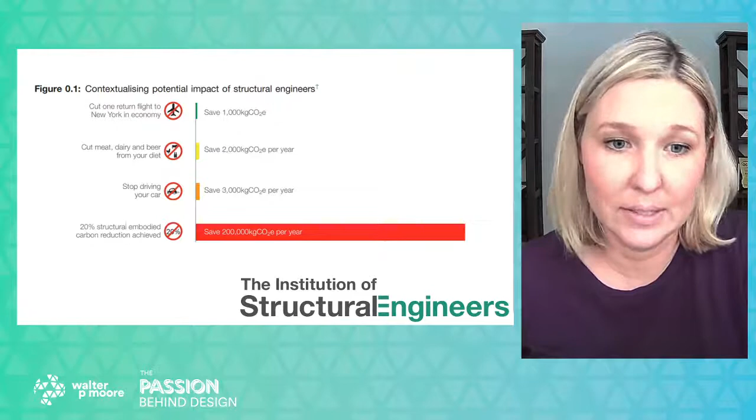So we'll dive in here about what are carbon footprints. Carbon footprints are the total amount of greenhouse gases, including carbon dioxide and methane, generated by our actions. For a building, the carbon footprint is all of the carbon generated by three buckets: embodied, operational, and transportation carbon. Transportation impacts are all the impacts related to transportation to and from the building.

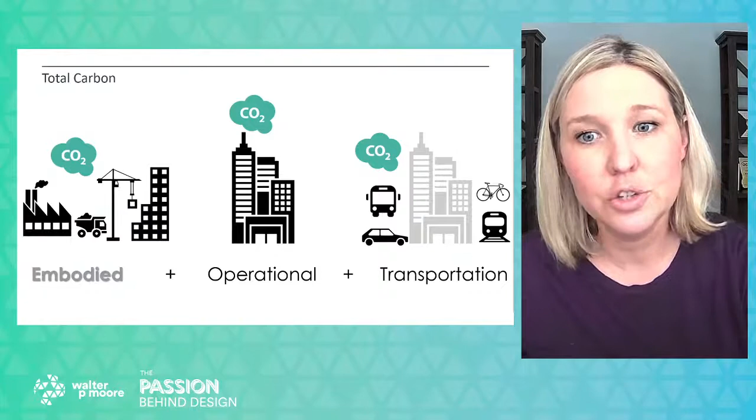Operational is all the energy or carbon it takes to run the building. But today I'm going to be mostly speaking about embodied carbon, because this is the piece that is largely within my control as a structural engineer. Embodied carbon has to do with all the materials and products used to construct the building. It's all of the carbon dioxide emitted by extracting, manufacturing, transporting, and installing materials.

And it's not a small amount of carbon. Every year, 66 billion square feet of buildings are constructed, and the embodied carbon emissions of that construction is approximately 3.8 billion metric tons of CO2 per year. That's a lot of carbon. In fact, we're building so much that we're actually building a new New York City every month for the next 30 years. And between now and 2050, we're going to add 2 billion people to the planet and close to double the square footage of the built environment.

So next, I'm going to play a little video, hopefully it works, from Bill Gates, and he's going to talk about basically the basics of embodied carbon. So let's watch.

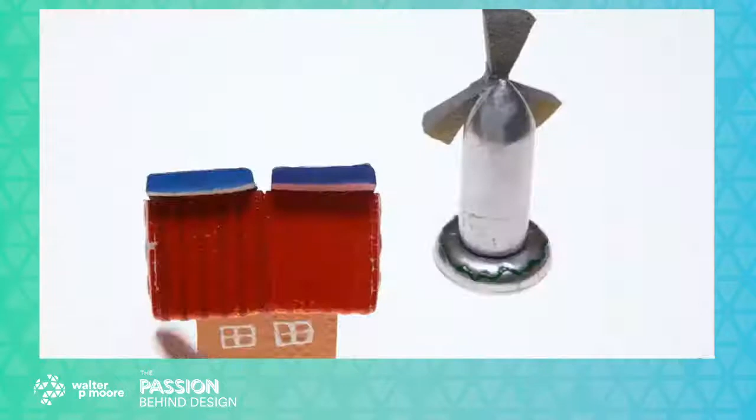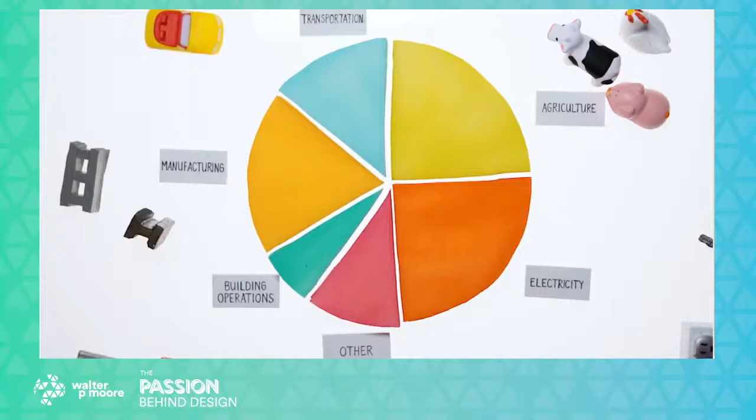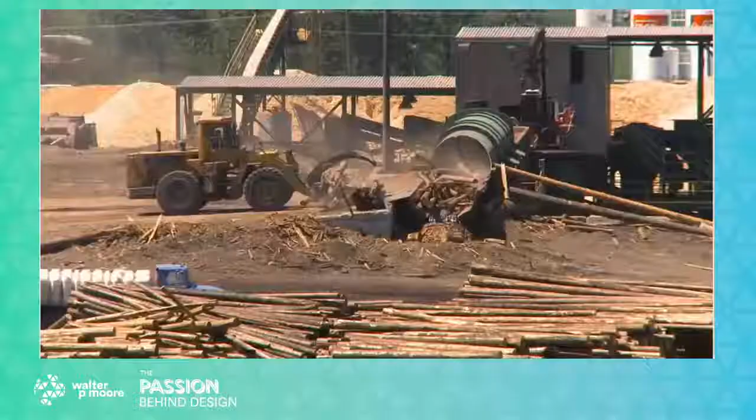Well, let's talk about climate change. Now, people think, hey, aren't we getting solar panels and windmills to be a lot less expensive? And isn't that helping reduce greenhouse gases? And the answer is absolutely. But there's a lot more to do than just taking electricity to zero emissions. There's a variety of things that generate greenhouse gases. We have a lot of sectors of the economy, like manufacturing, that are emitting greenhouse gases that aren't talked about as much. Manufacturing, everything we make, even a cute little squishy like this, that's emitting 31% of the greenhouse gases. The number of buildings in the world is going to double by 2060. It's like we're going to build a new New York City every month for the next 40 years. It's a gigantic amount of materials. Steel, cement, wood, all emitting greenhouse gases. We're going to have to figure out how to make all these things in a different way. And so we're going to need a lot of change, a lot of innovation to bring the emissions from all those areas down to zero.

So I think that's a great video that kind of sums up what we're dealing with. All the little squishies and all the things we're making, they all have embodied carbon. And for us in the building industry, there's a lot of embodied carbon because we're dealing with really highly impactful materials like concrete and steel. And so we need to figure out how to reduce our impact.

And we know that if we carry on with business as usual, the Intergovernmental Panel on Climate Change shows that we will well overshoot the goal of staying below 2 degrees Celsius. That's the goal. We don't want to increase global warming. We want to stay below that 2 degrees Celsius threshold. And in order to do that, we need to change the way that we're doing things.

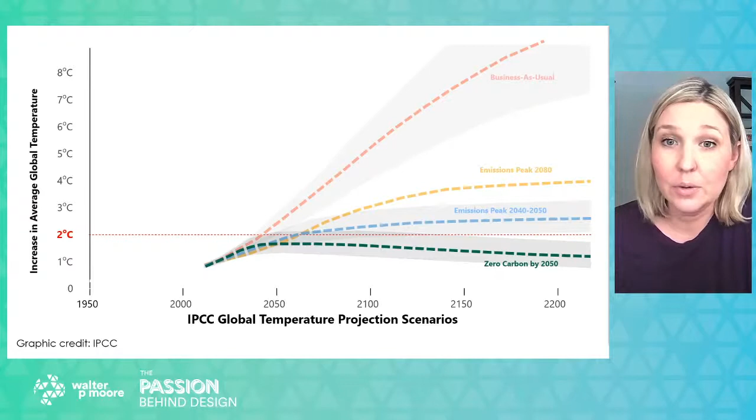So looking at this a different way, these graphs are from Architecture 2030. It's a group that focuses on sustainability in the built environment, a group of architects that are really focused on this. We know that buildings alone account for 40% of global greenhouse gas emissions. And 28% of that is from operational, which is largely where the focus has been, and rightly so, because it was a bigger piece of the pie.

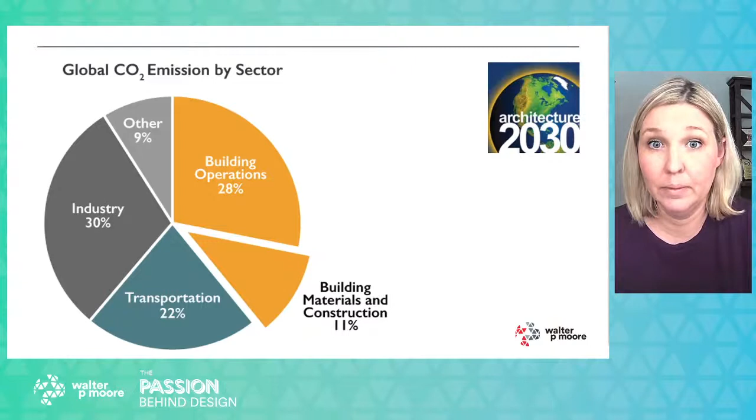But the thing is that as we've driven down operational emissions by putting PV panels on the roof and focusing on reducing the operational impact of the building, we've needed to make a shift to focus on the 11% that's due to embodied carbon. And the critical thing about embodied carbon is that it happens day one when the building opens, and it never gets reduced. There's no future efficiency that'll drive it down. You can't decide, okay, let's put PV panels on the roof and in any way affect the embodied carbon that's already there. It's there when you build the building. It's there when you construct the steel frame. It's there when you pour the concrete, and there's nothing you can do about it later on.

In the next 30 years, the critical time period according to the Intergovernmental Panel on Climate Change, embodied carbon will account for half of new construction carbon. So as we approach 2050 and try to decarbonize the building industry, we can't get there without focusing on this piece of the pie.

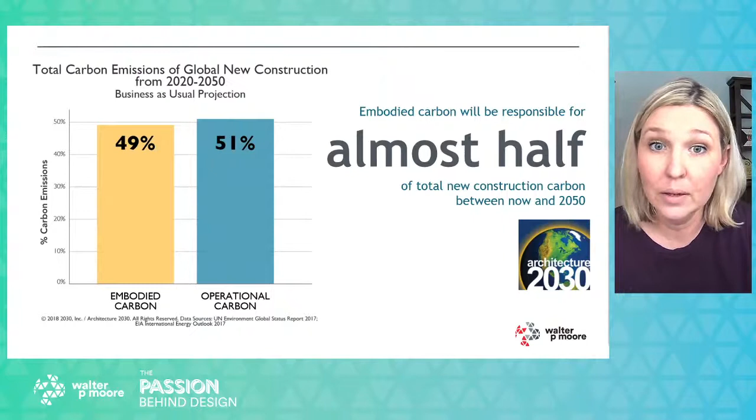The breakdown of embodied carbon can vary wildly from project to project based on size and materials. All buildings are really very different. But we know a couple things: most of the emissions are from structure, mostly steel and concrete, and most of the impact from concrete is from the cement.

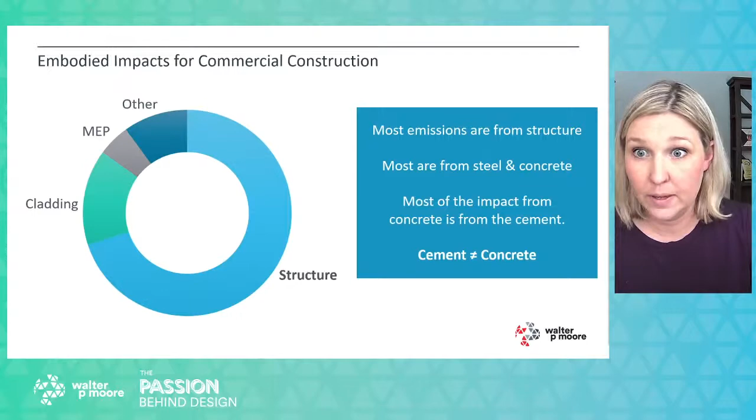Cement is not the same thing as concrete. Cement is a part of concrete. Cement is to concrete what flour is to a cake - it's just one of the components. It's the binder. Concrete also includes aggregates, rocks and sand, water, air, and admixture.

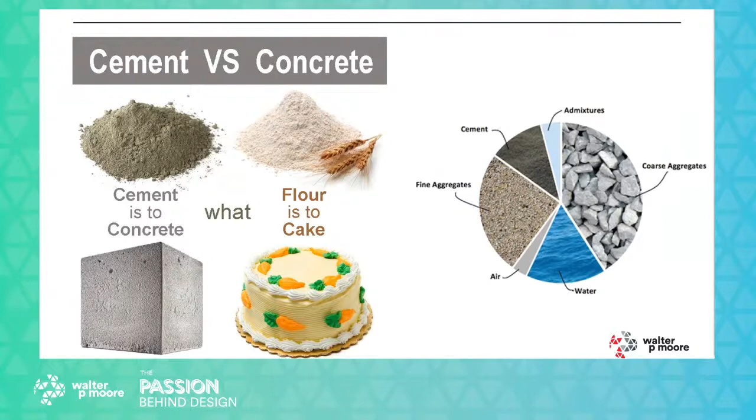Cement actually makes up only 12% of the weight of concrete, but it's responsible for 95% of the carbon emissions. It's the second most consumed resource in the world after water, with more than 4 billion tons produced globally every year, and it accounts for 5 to 8% of global carbon emissions.

The reason this material is so carbon intensive is because it takes a lot of energy to produce, and it produces CO2 as part of the reaction. So it's a double whammy.

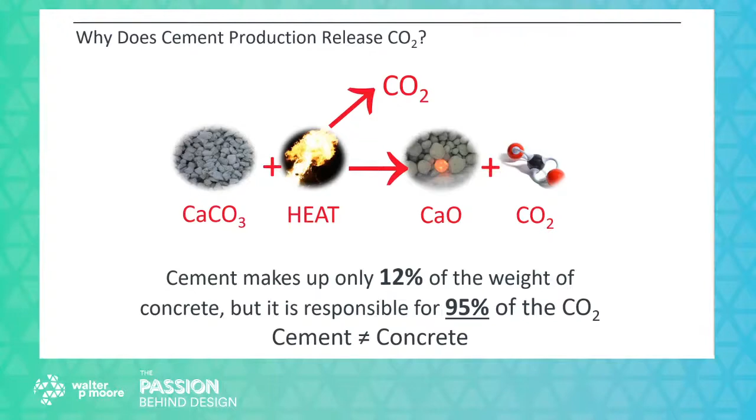But in many cases, we can actually use less cement, and we really should try. I'll talk more later about how we try to use less cement in our designs. If you're looking for more information on concrete and embodied carbon, search YouTube for these Girl Scouts. This topic has gotten so mainstream that even the Girl Scouts are talking about it and concerned about how we're going to reduce the embodied carbon in building materials.

So let's pause here for some questions and discussions, and we'll get into what the building industry has been doing about embodied carbon and what you can do.

So Kelly, what is the biggest hurdle in the building industry when it comes to sustainability? I think it's just thinking that we should always do things the same way. A lot of the building industry just wants to do what they did yesterday because they know it works, they know it's safe, they know they can get those materials. So trying to think outside the box, trying new things, is one of the biggest hurdles in sustainability.

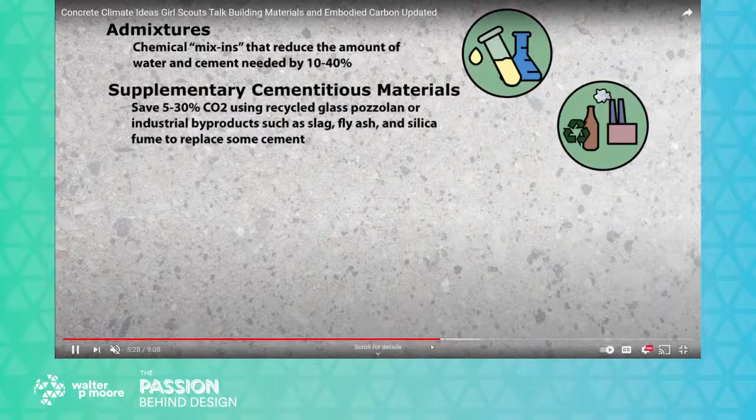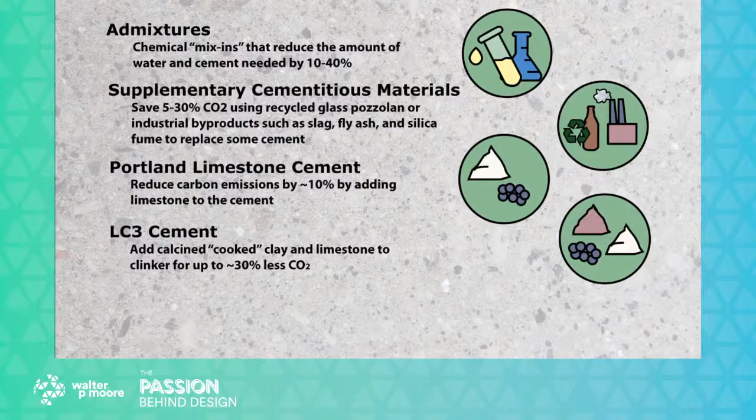So how often do you speak to clients or architects or people deciding whether a building is more sustainable or not? How many times a week do you make this pitch as to why we should be more sustainable in our approach to building? Yeah, I talk about this almost every day because that's part of what I do - lead these conversations. So I'm having sustainability conversations every day, and there's a lot of people discussing this all the time.

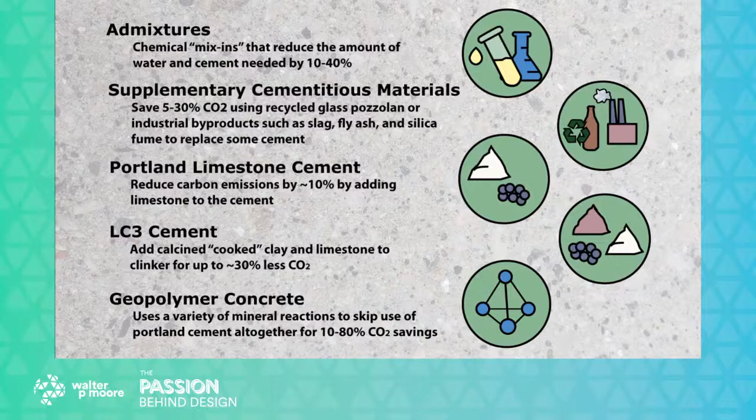Since I know we're speaking to a student crowd, I want to assure you that the industry is focused on this. We are having these discussions on our projects. We are trying to figure out how to make things better, how to make our buildings better, and how to come up with new ways to address these problems.

Great, so let's continue, and I'm sure you're going to share more about different organizations you're a part of and other things you're doing to progress the industry to a more sustainable future. Yeah, so let's see what the industry's been doing about embodied carbon.

There's been a groundswell of discussion and advocacy around embodied carbon in the last couple of years. In 2019, the World Green Building Council released the Embodied Carbon Call to Action report. This is the first call to action that really started to name all the stakeholders involved in embodied carbon and task them with what they can and should do about it, with deadlines.

Architecture 2030, a group I mentioned earlier, is a leader in this space. They first issued the 2030 challenge for all new buildings, developments, and major renovations to be carbon neutral by 2030. But this only dealt with operational energy. So they issued a 2030 challenge for embodied carbon to be carbon neutral by 2050 - this was an add-on that they provided.

Then also the American Institute of Architects, or AIA, has AIA 2030, which is a commitment to the 2030 challenge issued by Architecture 2030. They've also made a commitment to materials as well and increased their attention to embodied carbon. Another organization that's a true leader in this space is Carbon Leadership Forum.

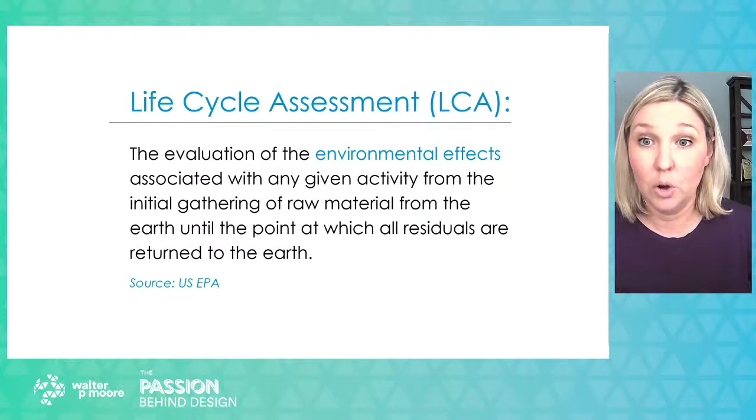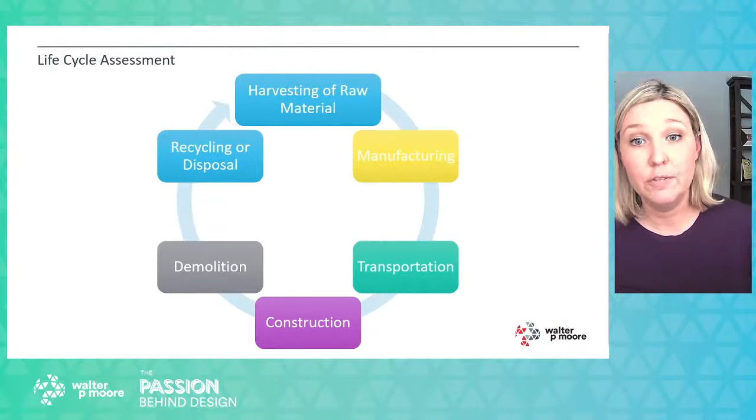It's an evaluation of all the environmental effects of a material or process, from the initial gathering of the material from the earth until the point at which all residuals are returned to the earth. It's an ISO-governed process, meaning governmental agencies govern what this process looks like. We look at all phases in the life cycle of the material, from harvesting through manufacturing and construction to demolition and disposal.

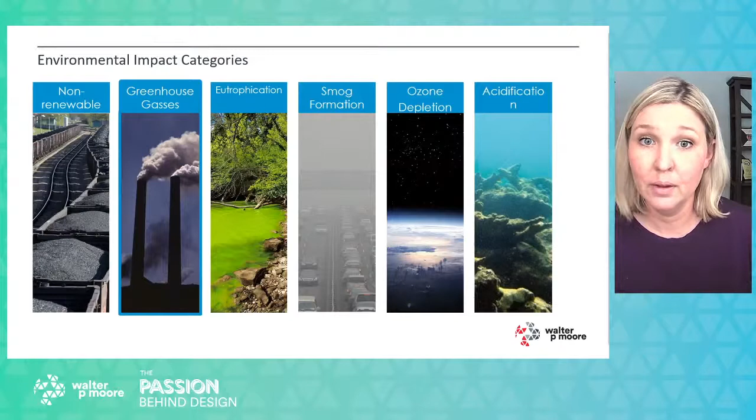Then we look at multiple environmental impact categories, including greenhouse gases or global warming potential. So we establish our baseline structure for our whole building LCA. We look at all of the structure and all of the enclosure. From there you can also consider other elements like carpet, floors, or ceilings, but at a minimum we're looking at the structure and the enclosure.

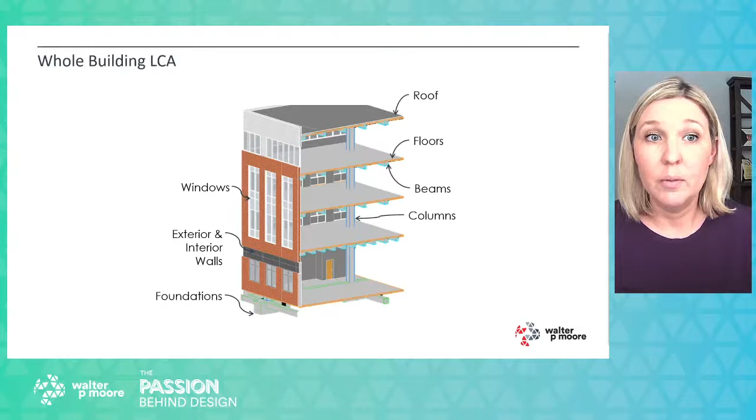And then we put it into a software. In order to actually perform the LCA, or the embodied carbon analysis, you have to start with quantities - how much concrete, how much steel, how much wood is in your building. We can usually get this from our building information model.

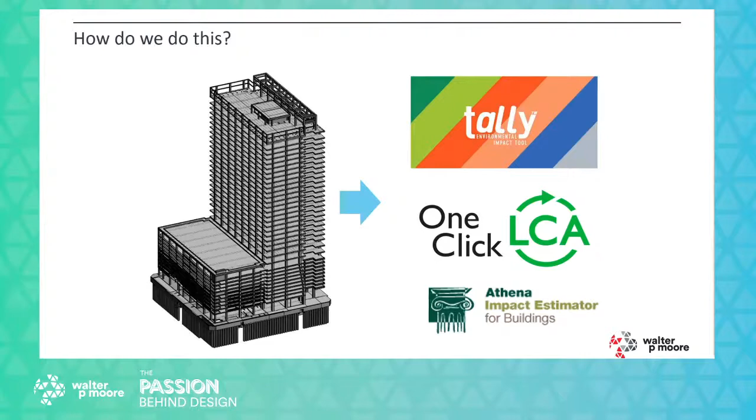We use a program called Revit in order to produce our drawings and build 3D models. Then we can take all the quantities in those models and put them into an LCA software - I've listed several here, such as Tally, One-Click LCA, and Athena - to get the environmental impact of all these materials.

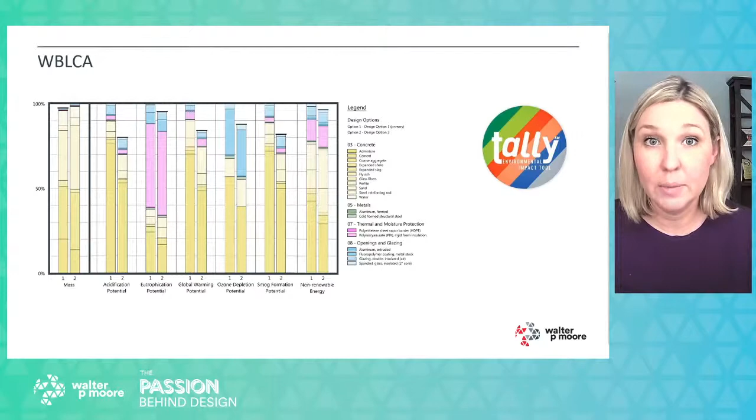And from that you get an output showing, in this example, a 1 and a 2 - your baseline building and an improved building where you've made better decisions. It breaks down the impact by material, and from this you can determine where your greatest impacts or hotspots are, then take steps to reduce your impact.

These are some strategies we use to reduce our impact: things like specifying less cement. We can use supplementary cementitious materials like fly ash, a byproduct of the coal industry, or slag, a byproduct of the steel industry. These are similar to cement but not exactly cement - basically recycled products because they're byproducts from other industries. We can use those materials in lieu of cement, which is really carbon intensive.

We can also specify each mix for its appropriate usage. What that means is sometimes we'll let our columns and foundations cure a little longer - they don't need to get strength so fast - so we can use less cement in those mixes.

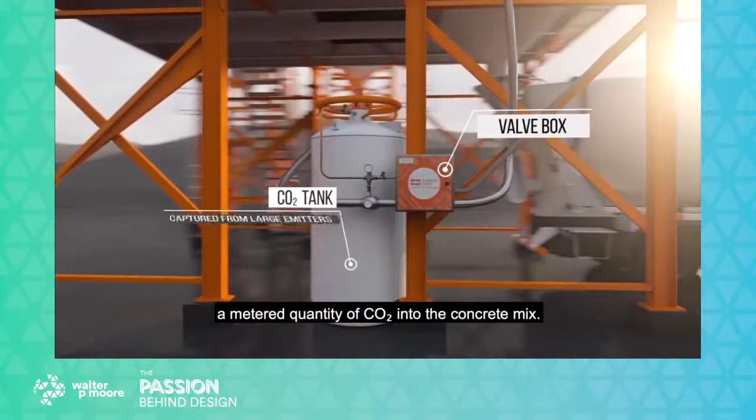We can also use really cool technologies like CarbonCure, where they inject CO2 gathered from industrial sources into a concrete mix. It not only makes the concrete mix stronger, but also reduces the cement content. We inject that CO2 into the mix - it allows more concrete particles to form, reduces the cement content, and actually sequesters carbon. It's a really cool technology, and there's a lot of other neat technologies available on the market.

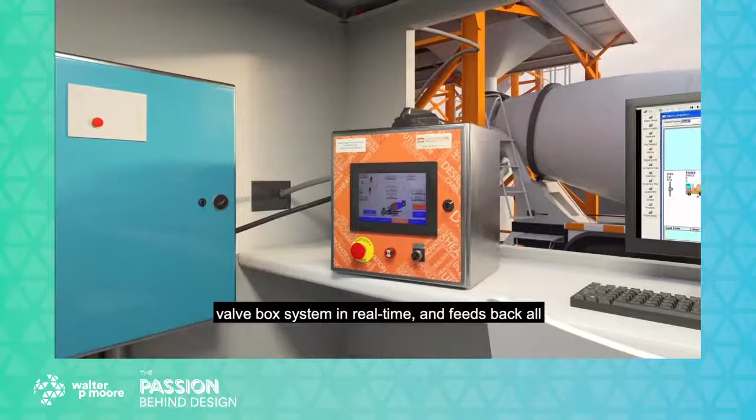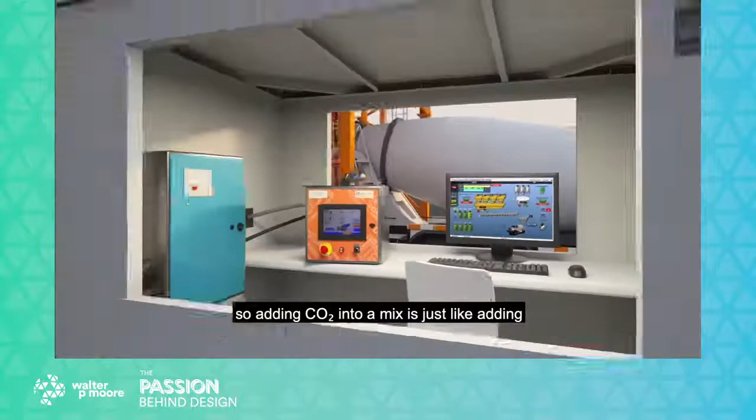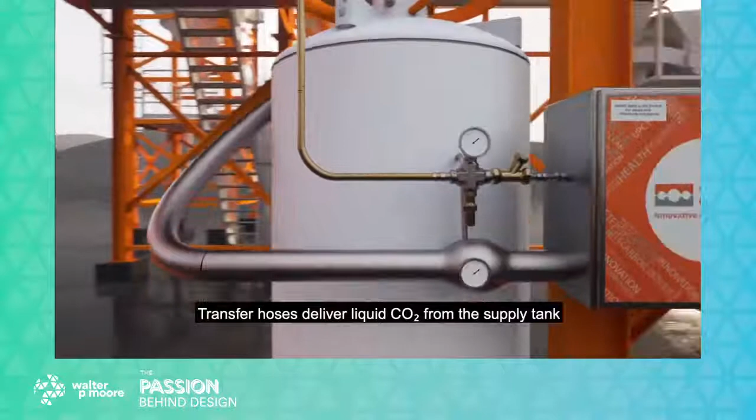We can use salvaged materials - materials that have been used in another application, maybe a steel beam or wood, in different types of applications. We can better understand our supply chain. Sometimes just knowing you're going to get your steel from a plant that runs on a PV grid versus a coal grid can really improve the embodied carbon of your building. So knowing all these things, repurposing existing buildings, being really efficient in our designs - all of those things can help lower the embodied carbon of a structure.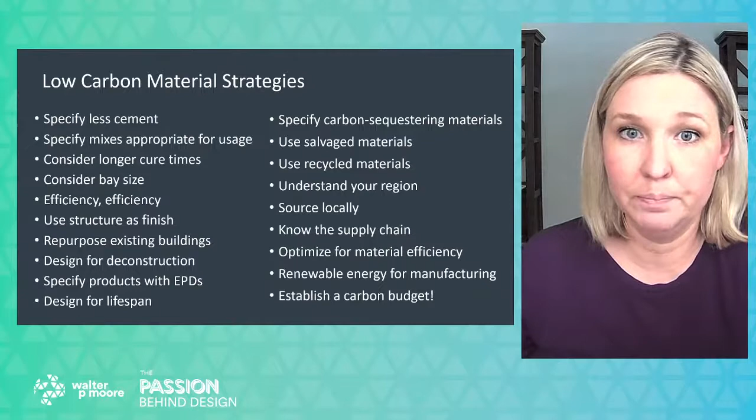We use this LCA thinking when coming up with ideas for the types of buildings we're going to design, and we can use it to decide which structural system to use. In this example, you have cast-in-place concrete and structural steel, and two types of wood structures. We looked at where the impacts are for each of these, and can we make a decision for this building based on the lowest embodied carbon impact?

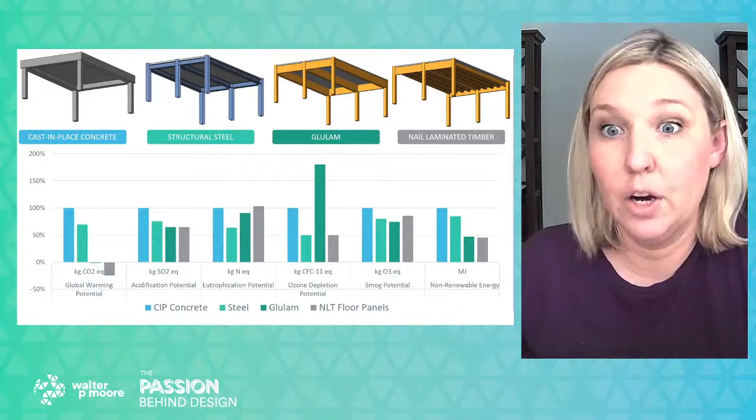So I think let's pause again for some questions, and then we'll wrap this up and talk about some available resources. So Kelly, does the distance by which you source products make an impact on the sustainability metrics for buildings?

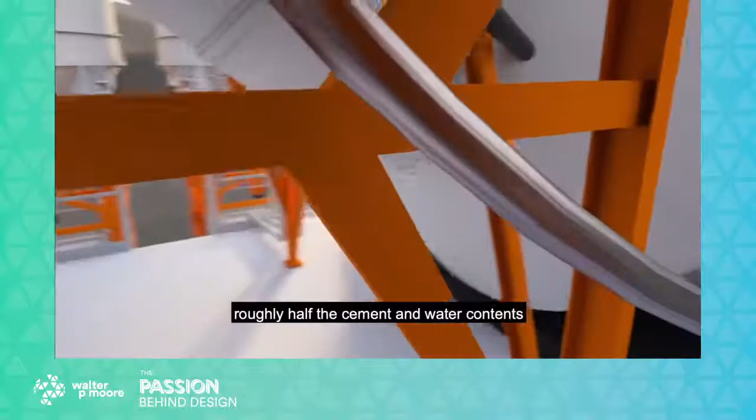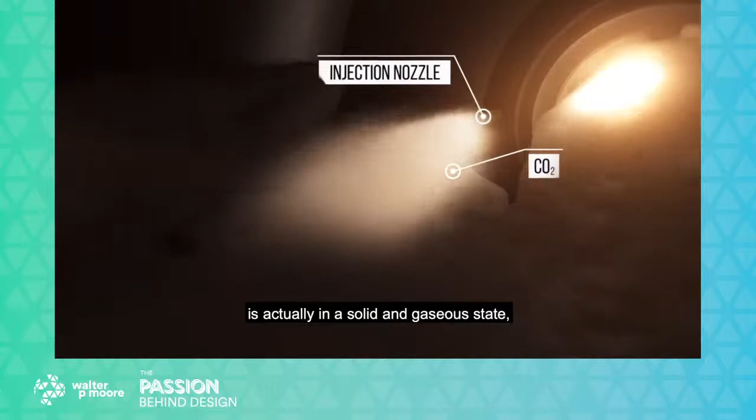So it can, it's something that we consider. We factor in transportation impacts when doing a whole building LCA, but sometimes it's better to use a product from farther away if it's lower carbon than a more local material that's higher carbon. It used to be that we just looked at regional and recycled materials, attribute-based things. But now that we're doing whole building LCAs, we can take all of that into account, comparing lower carbon materials from further away versus higher carbon materials that are local. So the answer is it depends, and we consider that.

Do you participate in any of the organizations that you highlighted in the past section? Yes, I participate in all of the organizations that I highlighted. We are really active at Walter P Moore with all of the industry organizations. We want to make sure we're touching them all and staying in contact with all of those organizations that are having an impact on the way we're looking at sustainability, how we're addressing embodied carbon, and all the decision makers.

All right, let's move on and talk about other resources available. I wanted to point out a couple embodied carbon resources that you might find useful.

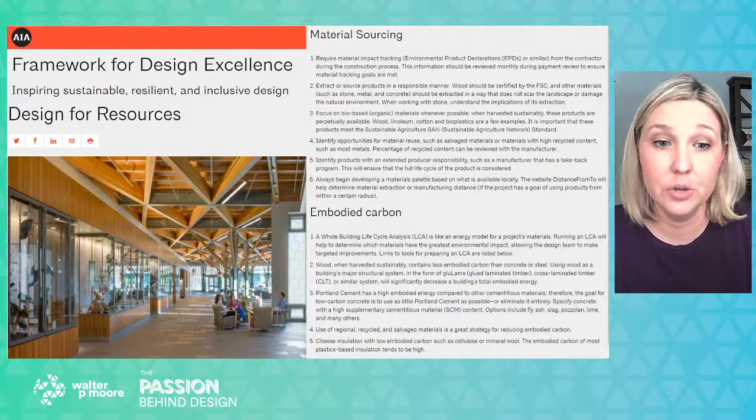The first resource is the AIA Framework for Design Excellence. The framework is made up of 10 measures, and it's intended to be really accessible to every architect for every project. It's a great resource that deals directly with embodied carbon and best practices, and it's really attribute based, giving best practices, best things to do on projects. It's an easy to read resource for anyone interested in learning more about what architects and engineers are doing to address embodied carbon.

The next one is a really interesting resource: the 2030 Palette by Architecture 2030. This goes beyond embodied carbon. The 2030 Palette is a free online platform that curates information and practices and provides guiding principles for creating low carbon buildings. The sustainable design strategies address energy consumption and greenhouse gases at all scales, from regional and city planning to big building details to small building details that can even be applied to residential.

As part of the palette, there's a materials palette that was developed specifically for materials and embodied carbon. It's an attribute-based approach to embodied carbon reductions that identifies key attributes contributing to a material's embodied carbon impact, and it offers guidelines and options for emissions reductions.

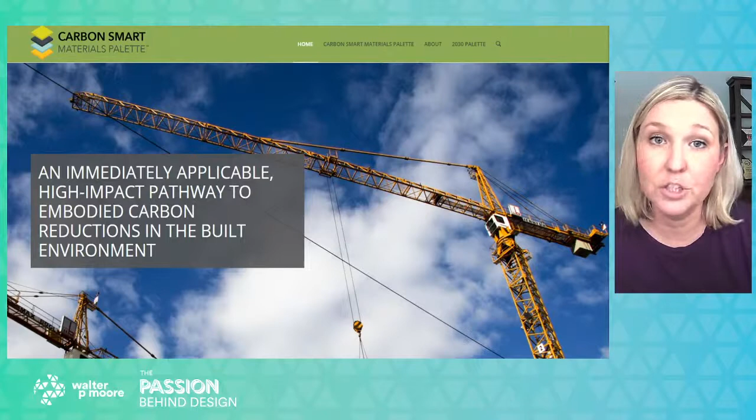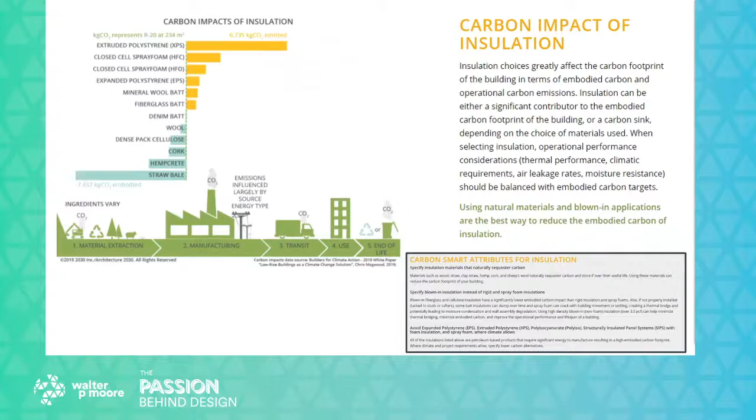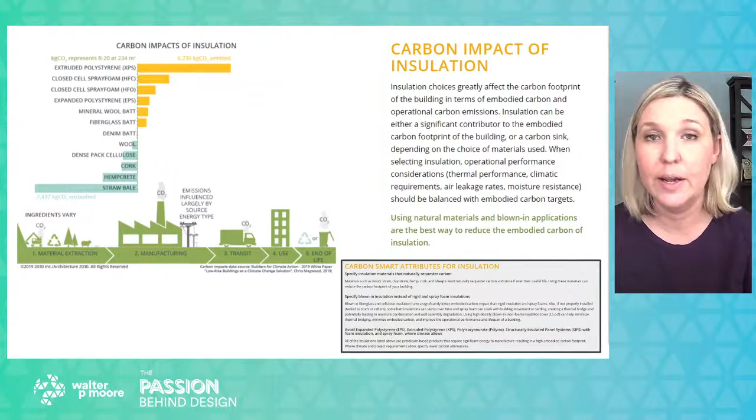The palette offers great information on different materials and how to make better choices. This is the insulation page, for example. Insulation is like a sweater for buildings, the thing that goes on the outside that keeps them insulated. This is basically a guide on the best types of insulation with respect to carbon. It provides a list and says straw bale is the best, and EPS and XPS are the worst. It also tells you about the whole manufacturing process, so it's a really cool resource to find out how materials are made, why they're carbon intensive, and what better choices are available.

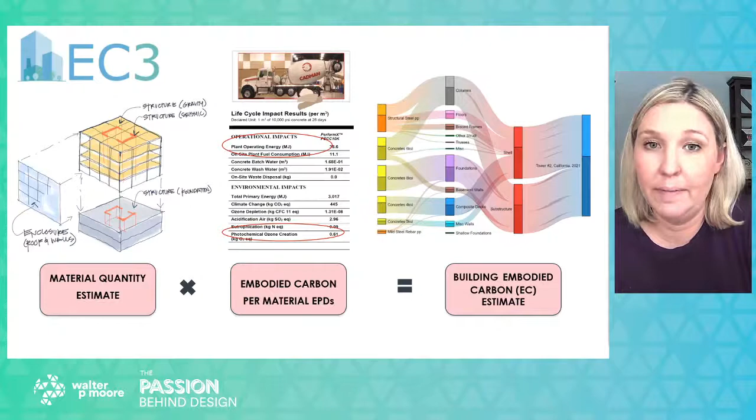This is another free resource, the Embodied Carbon in Construction Calculator, or EC3. You can basically build a whole building in here and see the carbon impact of that building and where you can make reductions, whether in the concrete, steel, carpet, or ceilings. It's a great tool to play around with, creates really cool graphs, and it's free, so I recommend you try it out.

And then this is just a really simple tool to get an understanding of what kinds of numbers we're talking about when we're talking about embodied carbon. This is called Ecom, the Embodied Carbon Order of Magnitude tool, and it was created by SE 2050.

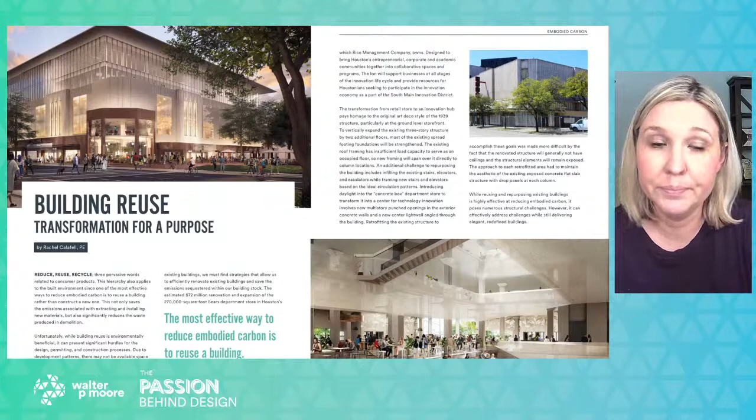At Walter P. Moore, we wanted to contribute to the conversation, so we issued this embodied carbon report. It's a clearer view of carbon emissions, with great articles and resources that dive into embodied carbon and how we're tackling it as a firm. It has a lot of great project stories and best practices of what we're doing on our projects and how we're trying to make our buildings better. That's all I have for today, and I'd love to take any questions. Connect with us afterwards if you're interested in learning more.

Thanks, Kelly. A few questions before we sign off. How can you tell if a building is sustainable and made of whatever type of material? Is it easy to tell? Is it difficult? If you're thinking about just looking at a building?

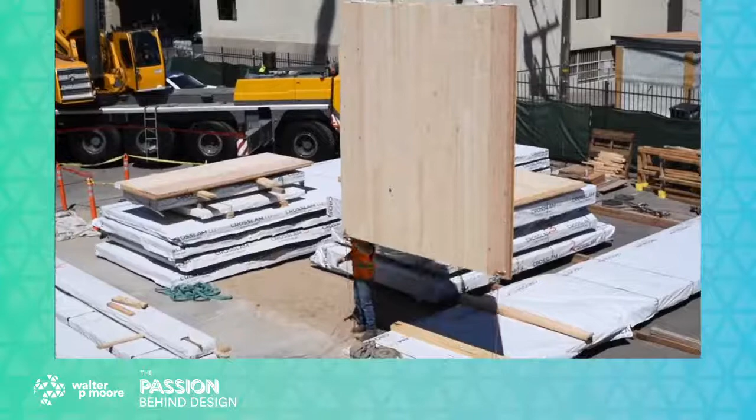It's not really easy to tell if a building is sustainable. For example, you may think a building made out of wood, let's say mass timber, is really sustainable, but it's really important where that wood came from. That's one of the things we look at when doing a whole building life cycle assessment, or just designing our buildings. It's really important where all the materials came from. You want to make sure that wood was harvested sustainably in a forest where they're replanting trees. It's not very helpful if you take wood out of a forest and put it in your building and then don't replant the trees. That stops the cycle right there.

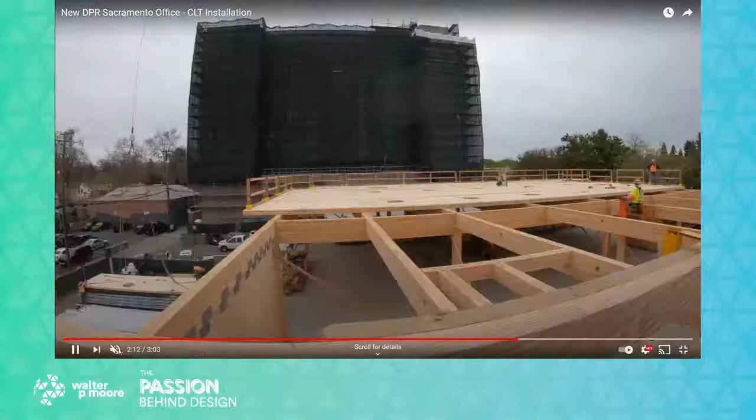So it's really important that you look at all aspects. That's why whole building life cycle assessment is so important, because it looks at the whole building holistically and doesn't just make assumptions about best practices. There are some best practices you can do without a whole building life cycle assessment, of course. Using the 2030 palette is a good way to do some of that, like using mineral wool insulation. There are always better choices you can make, but it's important that within those choices, you understand where those products came from.

Can you talk a little bit about LEED certification and how some buildings will have plaques in their lobby indicating it's a LEED certified project, and what that actually means? LEED certified buildings are really an important part of this. LEED is a driving force in trying to get developers, architects, and engineers to all follow the same set of standards to create sustainable buildings. So it does mean a lot—it means they've met a minimum set of thresholds and standards in order to create that building. It's a great starting point.

I think if a building is pursuing that, then it definitely means something. You don't always know exactly which things they did to get that plaque, but it's great when buildings pursue different rating systems, and there are quite a few—there's the Living Building Challenge, there's WELL, there's LEED, different ones people can adhere to. I think pursuing any and all of those is fantastic because it keeps everyone on the team accountable for maintaining minimum standards.